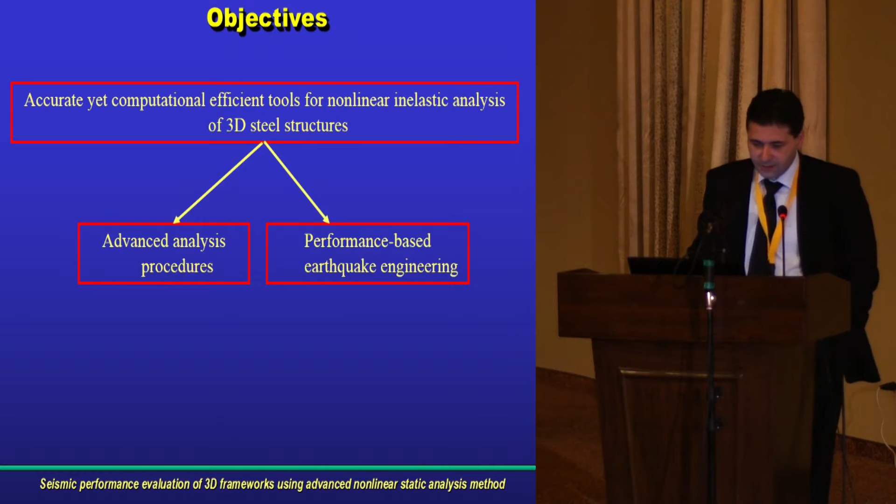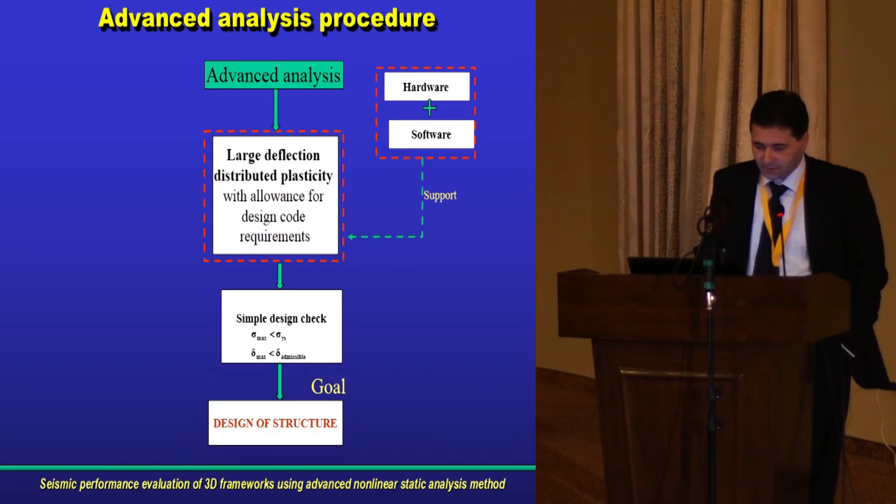In the advanced analysis procedure, accurate predictions of the nonlinear inelastic analysis of frameworks represent the key element, and such analysis can directly assess the strength and stability of the overall structural system. Separate member capacity checks are not required. A large deflection distributed plasticity analysis that includes spread of plasticity, residual stresses, initial geometric imperfections, and other second-order effects would certainly be classified as advanced inelastic analysis, in which checking of beam-column interactions is not required.

Reliable nonlinear analysis tools are also essential in performance-based earthquake engineering. Accurate predictions of the ultimate limit states are essential to perform pushover analysis, for instance, to compute the capacity curve for seismic performance evaluations of frameworks.

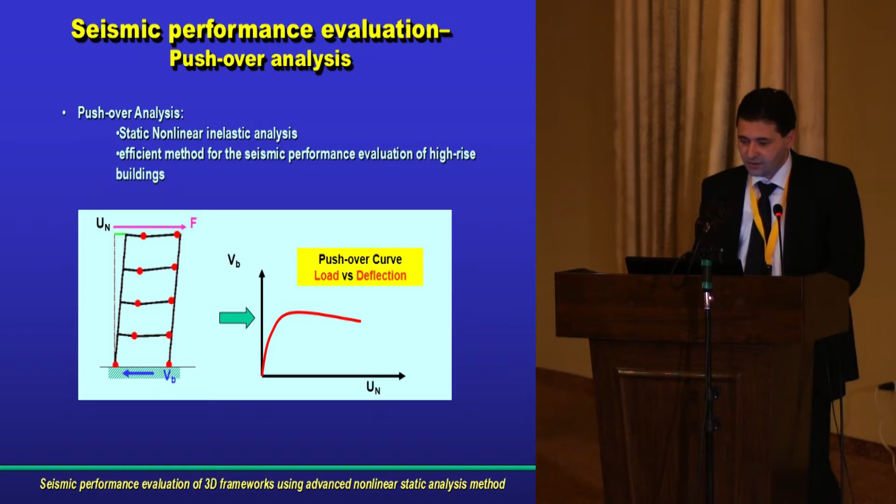The nonlinear inelastic static analysis procedures developed here use the accuracy of the fiber finite element approach for inelastic frame analysis, and address its efficiency and modeling shortcomings through the use of only one element to model each physical member of the frame. This is essential to approach real large spatial frame structures, combining modeling benefits, computational efficiency, and reasonable accuracy. The following assumptions are adopted in the formulation of the analytical model.

Plane sections remain plane but not necessarily normal to the deformed axis. Torsional buckling does not occur. Small strain but arbitrarily large displacements and rotations are considered. The connections could be semi-rigid, and this node is of zero length. The joints can also be considered with finite dimensions.

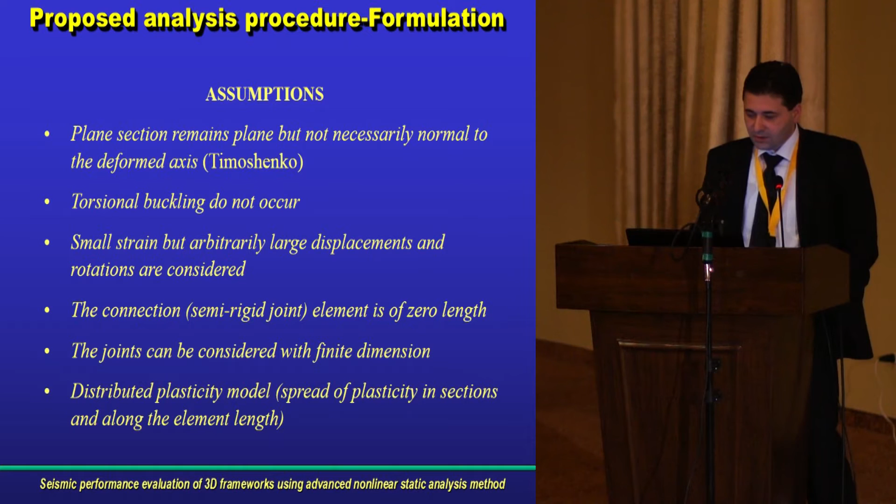The proposed approach is based on the most refined type of second-order inelastic analysis. A distributed plasticity model is involved, where elastoplastic behavior is modeled, accounting for spread of plasticity effects in sections and along the element length.

Currently several methods are available. One of the most used is based on the finite element method, which requires dividing the member into several small elements, and for this reason is not user-friendly for practical applications. These methods ignore many important characteristics and requirements for practical design, such as consistency between the linear and nonlinear models, due to the need to use several elements per member to model the nonlinear effects, which increases the computational effort.

The proposed element is developed in the framework of the flexibility-based approach. This element is more accurate than displacement-based elements because internal work is derived from an assumed force distribution function that relates the internal forces along the member length to the member end forces, allowing the use of only one element per member to model the inelastic behavior.

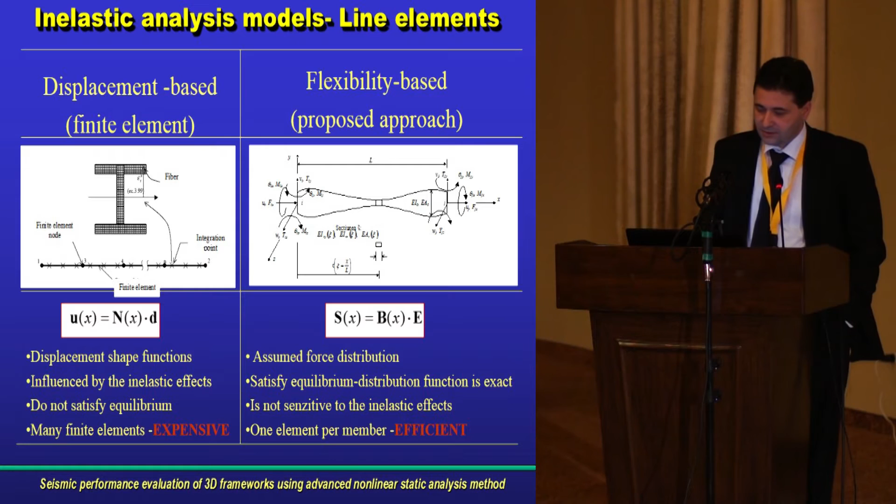A sketch of the three-dimensional beam column element with 12 degrees of freedom is presented on this slide on the right side. The already mentioned assumptions allow the formulation details to be considered on two distinct levels: the cross-sectional level and the member longitudinal axis level.

Thus, the nonlinear response of a beam column element can be computed as a weighted sum of the response of a discrete number of cross-sections located at the numerical integration scheme points. The cross-section stiffness may be modeled by explicit integration of stresses and strains over the cross-section area - in this case, we call the procedure micromodel - or by calibrated parametric equations that represent force-generalized strain curvature response, which we call the macro model.

Gradual plastification through the cross-section subjected to combined action of axial force and biaxial bending moments is described through basic equilibrium, compatibility, and material nonlinear constitutive equations. In this way, the states of strain, stresses, and yield stress are monitored explicitly during each step of the analysis. The arbitrary cross-sectional shape and the effect of material imperfections such as residual stresses, various cross-sectional shapes, and other factors are accurately included in the analysis.

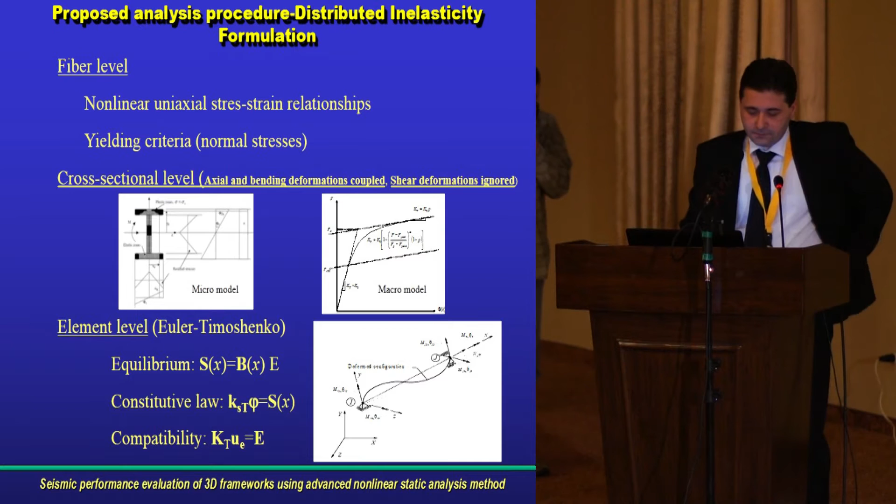One of the key issues in developing such a procedure is the high accuracy and computational efficiency in evaluating the elastoplastic behavior of cross-sections subjected to axial force and biaxial bending moments. Therefore, our research program has paid very careful attention to inelastic modeling of cross-sections, developing advanced procedures for moment curvature analysis, ultimate strength analysis to draw interaction diagrams, and automatic design procedures.

Considering the cross-section subjected to the action of external bending moments about each global axis and axial force, as shown in this figure, and under the above assumptions, the resultant strain distribution corresponding to the curvatures about global axis and the axial strain can be expressed in a linear form throughout the cross-section. This implies a perfect bond between the steel and concrete components of composite concrete-steel cross-sections.

The basic equilibrium equations for the axial load and the biaxial bending moments are given in terms of the stress resultants, and the deformations field is assumed linear. We can consider the equilibrium expressed using three equations for axial force and bending moments, and we can consider complex stress-strain relationships for concrete and steel, with arbitrary shapes of cross-sections accounted for.

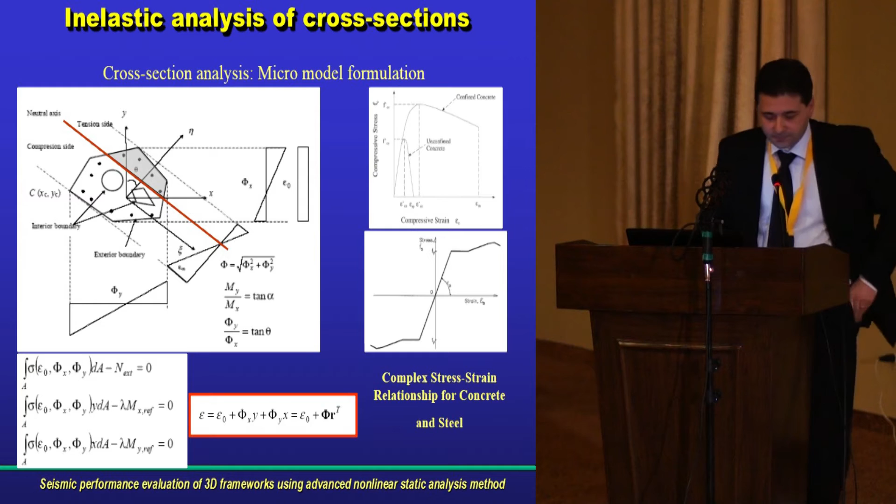We have developed three numerical procedures in order to highlight the inelastic behavior of cross-sections. One of the most comprehensive procedures is called here moment curvature analysis.

We consider the cross-section subjected to biaxial bending moments and axial forces. The equilibrium between internal forces and external forces is resolved by applying a numerical method, for instance Newton-Raphson. Solving this system of equations, we obtain parameters that define the deformations of the cross-sections: axial deformations and curvatures.

In this way, we can determine, for given external forces, the deformations at any point of the cross-sections. If the moment curvature diagram represents the concern, a more sophisticated numerical algorithm such as the arc length method is applied, and in this way we have a clear picture of the inelastic behavior of the cross-section.

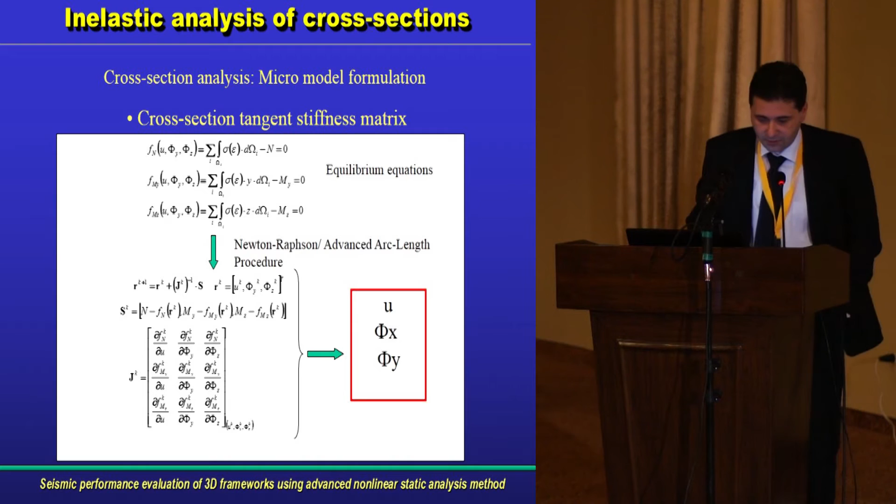The tangent stiffness matrix for the cross-sections relates small changes in the deformations to small changes in the action sustained. The incremental relationship between incremental efforts and incremental deformations can be expressed as in the equations, the matrix equations.

The tangent rigidity for major and minor axis bending are defined by solving the incremental constitutive equations and imposing the condition of constant axial load and bending moment about each principal axis of the cross-section. In this way, we can define the tangent flexural rigidities about each principal axis of the cross-sections.

These tangent flexural rigidities are used in the nonlinear analysis of frameworks. We can determine the stiffness matrix of the beam column element, considering the element with variable rigidities along the element length as a function of the distribution of the efforts.

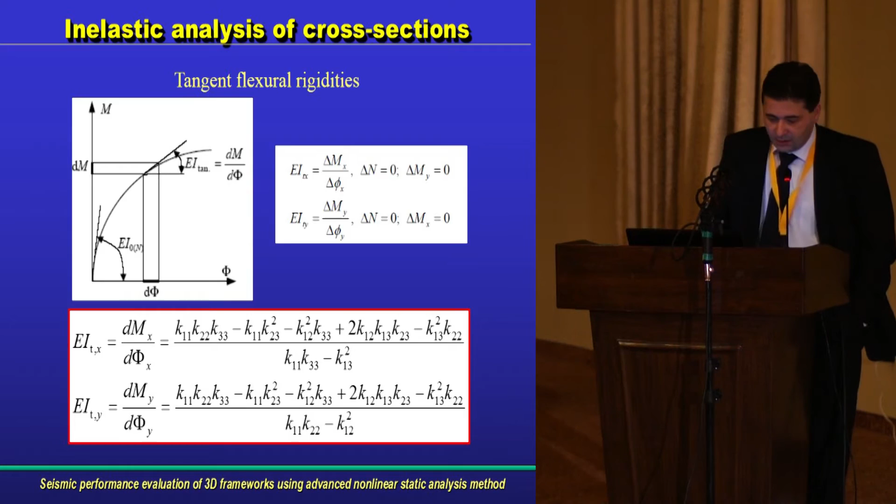Another numerical procedure has been developed to determine directly the plastic interaction diagrams. We can determine the plastic surfaces by drawing the vertical interaction diagrams or horizontal interaction diagrams. In this respect, an incremental iterative procedure based on the arc length approach has been developed.

At ultimate strain capacity, the equilibrium is satisfied when the external forces are equal to the internal ones, and at the most compressed or tension point the ultimate strain is attained. Under the above assumptions, the problem of ultimate strength analysis of composite concrete-steel cross-sections can be formulated as: given a strain distribution corresponding to a failure condition, find the ultimate resistances, axial force and bending moments about each principal axis, so as to fulfill the basic equations of equilibrium.

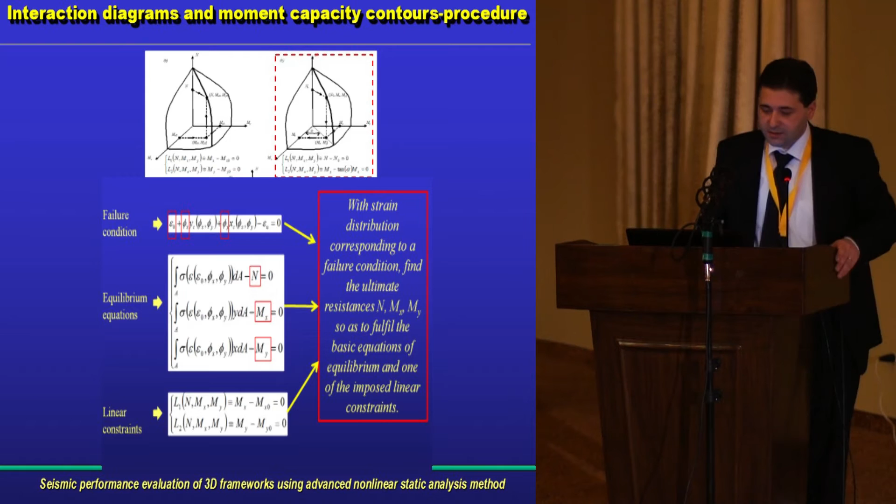And one of the following linear constraints you can see in this picture is accomplished. In this picture, I have detailed the procedure to determine the vertical interaction diagrams. For instance, for a given axial force and for a ratio between bending moments, we can draw automatically and directly the interaction diagram.

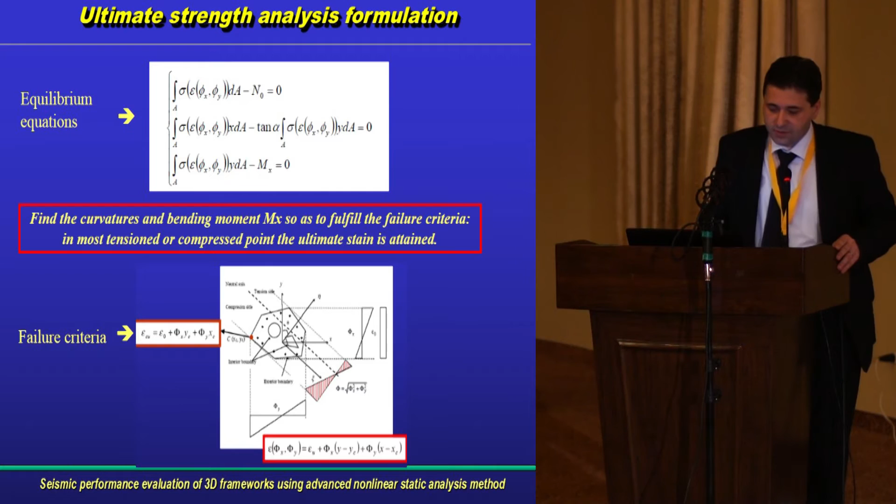Here are presented some key elements of the procedure. Basically, we have to resolve a system of equations with three coupled equations, imposing the constraint given by the failure of the cross-section at a point, at the most compressed or most tensioned point, where the ultimate strain is attained.

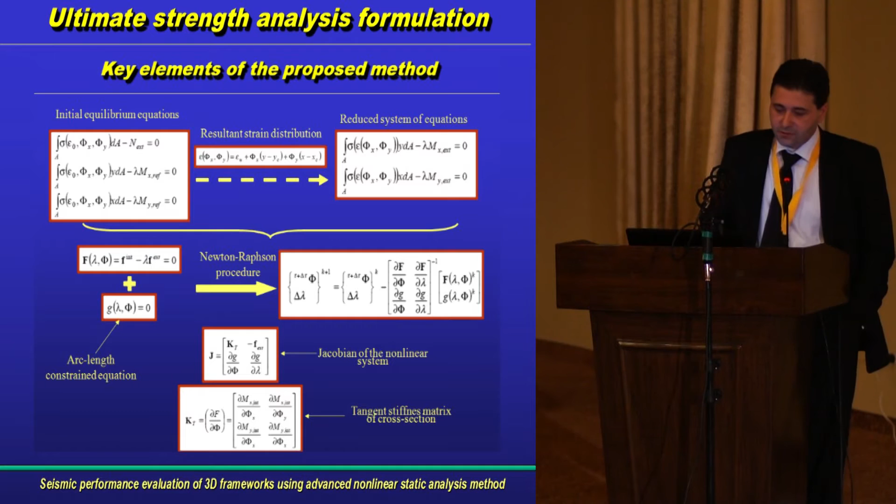The system of three coupled equations becomes two coupled equations, and these equations are solved by applying an arc length procedure, and in this way we can draw the complete diagram, varying the axial force as a parameter. Here it's presented the graphical representation.

Here we have the graphical representation of the procedure, and on the left side we have the representation in the moment ultimate curvature space, and on the right side we have the interaction diagram.

We can observe clearly in these representations that at the peak moment, the tangent stiffness matrix of the cross-sections becomes singular. This point corresponds to a balance point in the axial force-bending moment space.

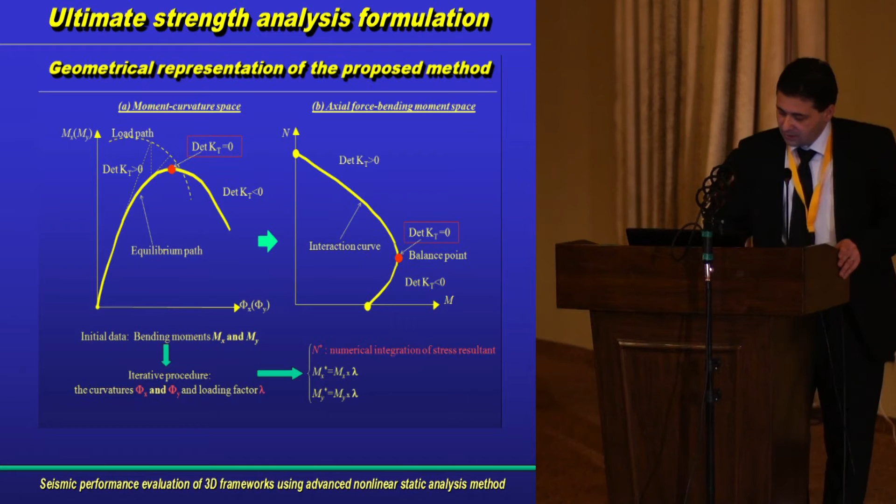Consideration of the arc length procedures, which can traverse the points beyond the peak points where the stiffness matrix becomes negative definite, is essential. So the arc length procedure is essential and is a key element of this procedure.

Another numerical procedure has been developed to automatically design arbitrary cross-sections, reinforced concrete or composite steel-concrete. The aim of this procedure is to determine directly the total reinforcement area, considering known external efforts for a given axial force and given bending moments. Automatically, the total reinforcement area is determined.

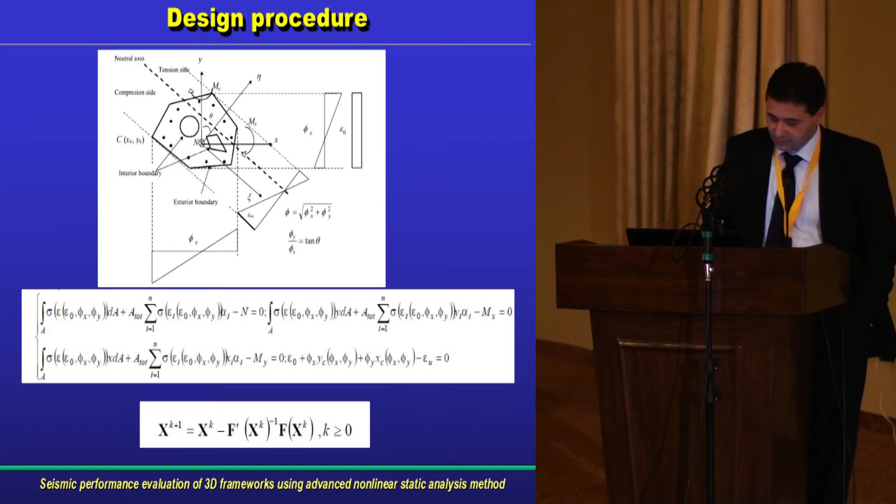One of the most important aspects of inelastic evaluation of cross-sections represents the procedure for integration over the cross-section, the tensions, deformations, and so on. Most existing methods for the analysis of cross-sections under axial load and biaxial bending rely on the numerical integration of stress resultants using the fiber decomposition method in the first row, Gauss quadrature, or computer graphics. All three mentioned methods are not numerically efficient due to the large amount of information needed to characterize the section and the high number of operations required.

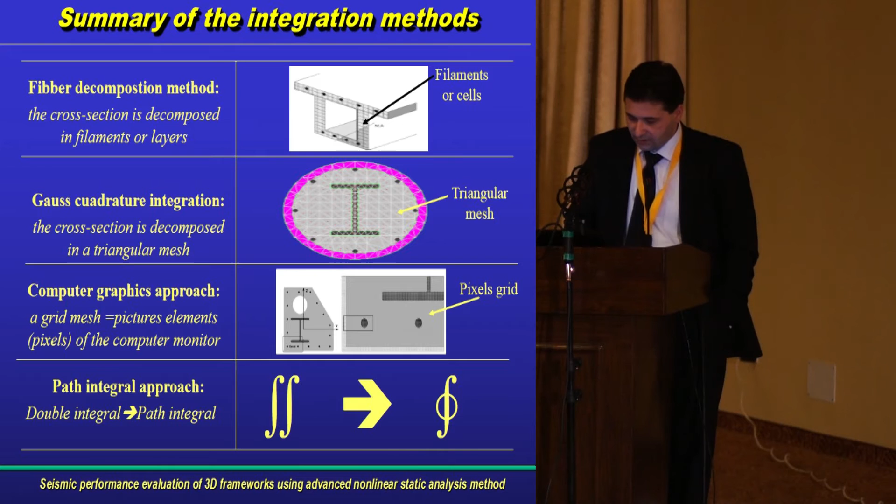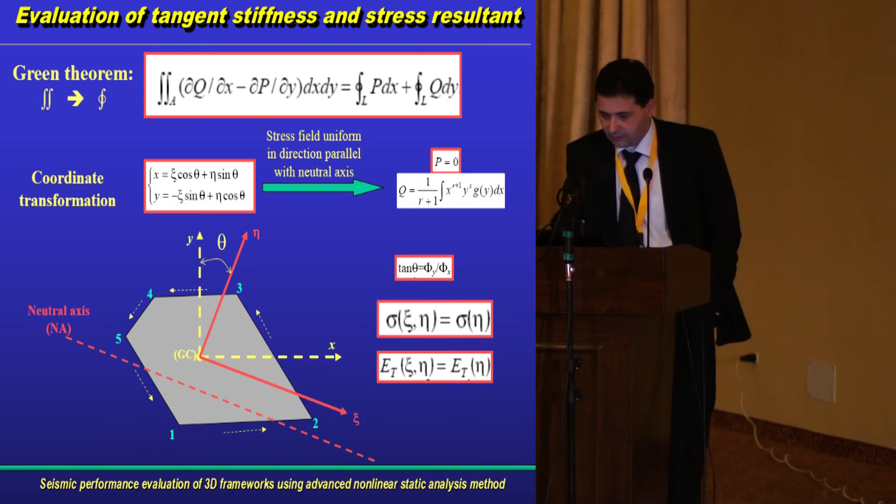to implement the stress integration with a lower error level. So we choose a more efficient approach, the path integral, and in this approach the double integrals are transformed into a path integral. We have in this way only to monitor several points on the contour of the cross sections, and this method is more rapid than current methods, and also gives more accurate results. We can take into account also the residual stresses.

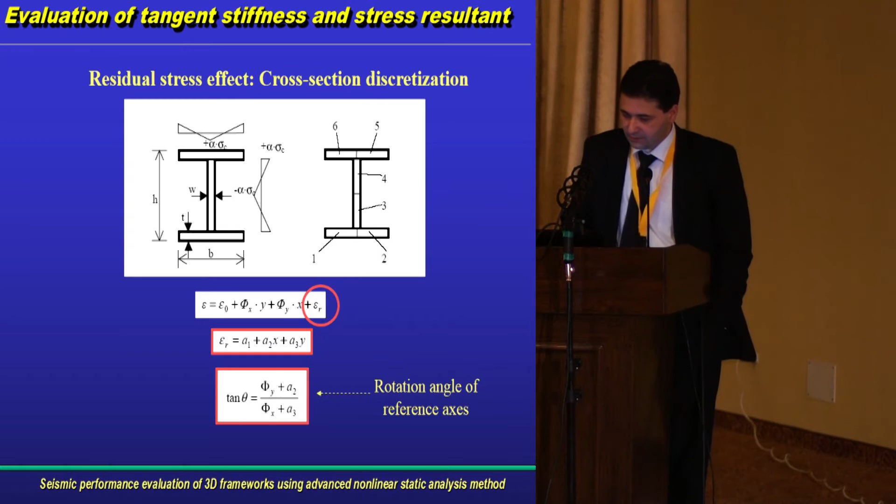Residual stresses are explicitly taken into account, considering several distributions given in norms, European or American. Also, various cross-sectional shapes we can take into account. Usually in the fiber-based finite element analysis, fillet regions of steel cross-sections are ignored. These simplifications could lead to underestimations of the rigidity and flexural strength of the whole element and structure as well.

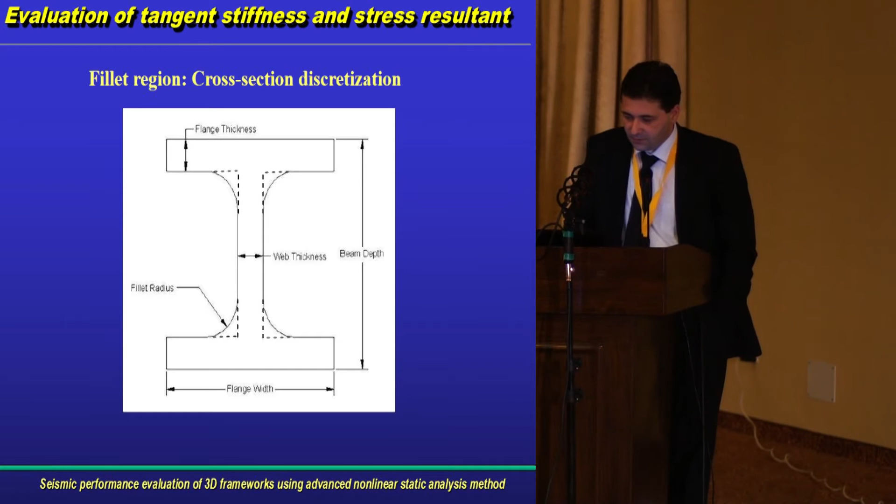And this aspect will be underlined here in several computational examples. It is important to mention that in the literature, this aspect is usually overlooked. Consequently, the results are not always consistent with the powerful computational models developed.

Another way to consider elastoplastic response is based on force-strain relationships. We developed only for steel cross-sections such an analytical relationship in order to represent adequately the partial plastification effects associated with bending and axial forces. In this approach, the effect of axial forces on the plastic moment capacity of sections is considered by standard strength interaction curves.

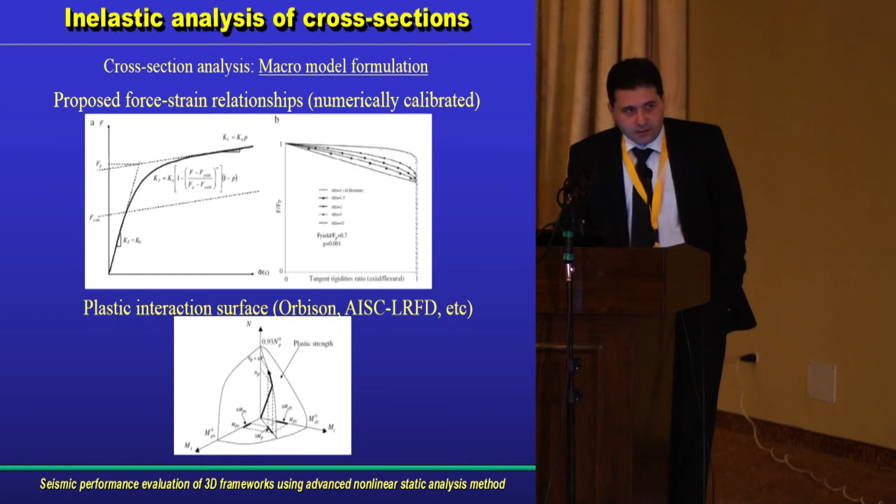Flexibility-based method is used to formulate the distributed plasticity model of a 3D frame element with 12 degrees of freedom under already mentioned assumptions. In this approach, an element is represented by several cross-sections located at the numerical integration scheme points. The spread of inelastic zones within an element is captured considering the variable section flexural rigidities along the member length, depending on the bending moments and axial force level, cross-sectional shape, and nonlinear constitutive relationships.

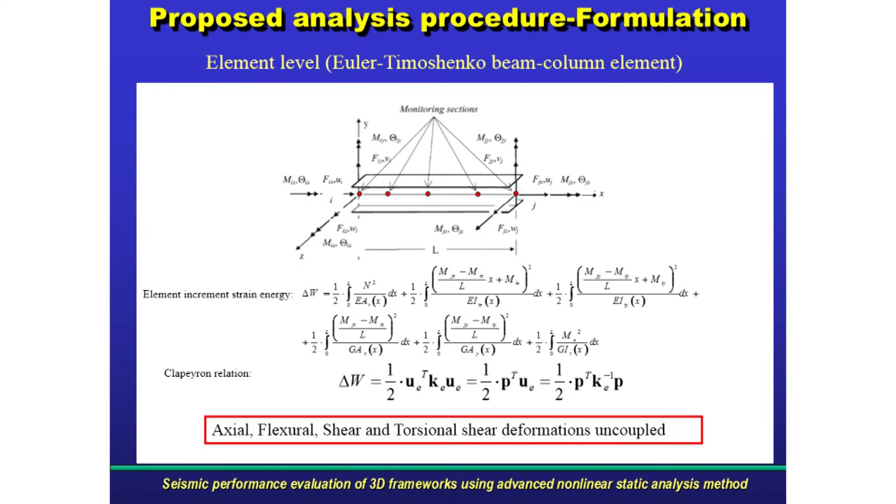The element stiffness matrix, implicitly defined by the Clapeyron relation, will be obtained by recovering the explicit expression for the element increment strain energy. Here are presented the basic relations, and here are presented some of the submatrices, the flexibility submatrix. The stiffness matrix will be determined by inverting the flexibility matrix.

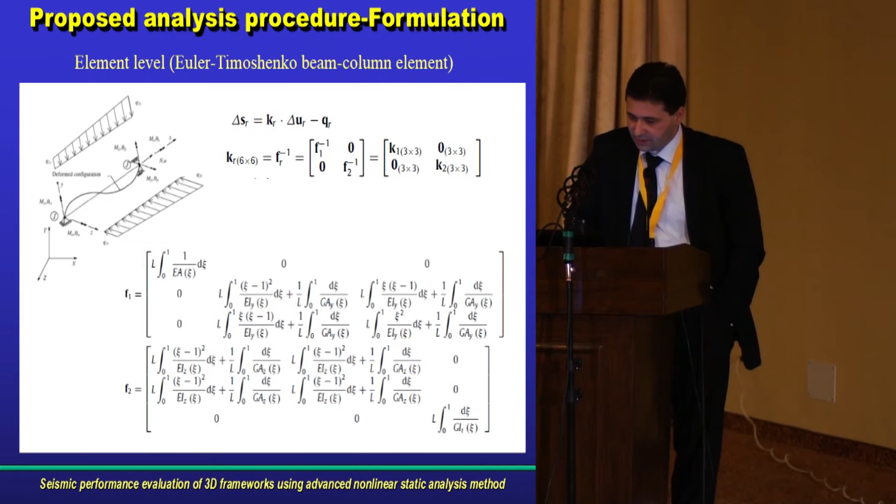It's important to note that in the proposed procedure, the loading that the member lateral loads transfer to the nodes, taking into account the element nonlinear behavior, are allowed and included automatically in the analysis. This leads to a significant saving in inputting the member loads without the need to divide the member into several elements for simulation of these loads.

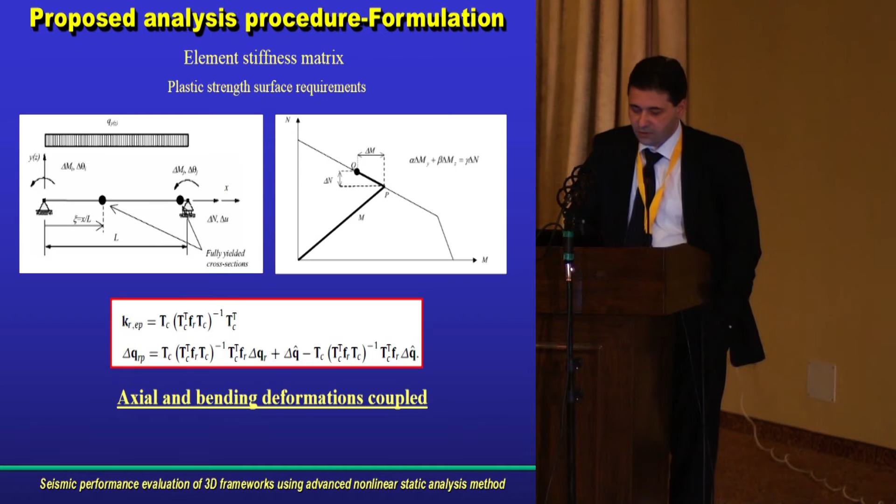The equivalent nodal forces will be computed in order to accommodate member lateral loads, local geometrical imperfections, and the plastic strength surface requirements. The method ensures also that the plastic bending moment is nowhere exceeded once the full plastic section develops.

Our procedure can be applied even when a plastic hinge, a fully plastified cross section, forms along the element length without the need to divide the member length into 2 or more segments as in the common procedures.

The geometrical nonlinear effects for each element are taken into account in the present analysis in a beam-column approach by the use of inelastic stability stiffness functions and updating at each load increment the length, axial force, and the flexural rigidity about each principal axis of the element. In this way, we minimize modeling and solution time. Generally, only 1 or 2 elements are needed per member.

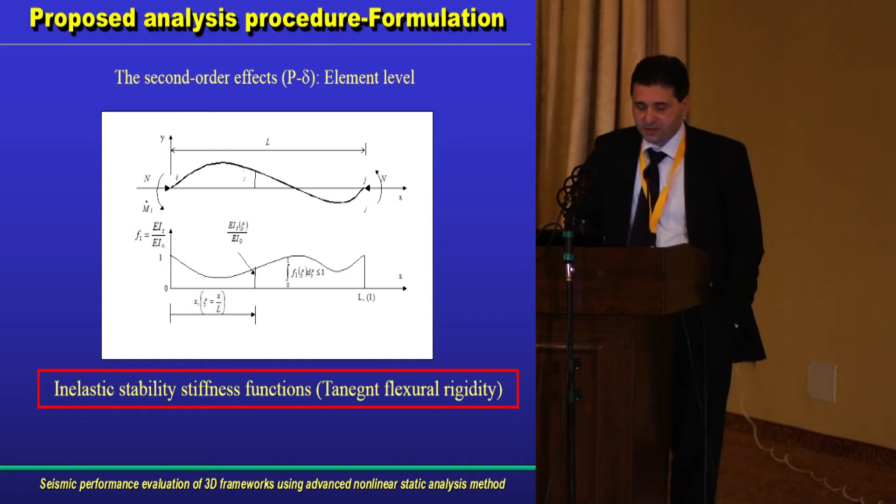The behavior of connection elements in each principal bending direction, major or minor axis flexibility, is represented by a rotational dimensionless spring attached to the member ends. We assume no coupling between different rotational degrees of freedom at the connection, and the present formulation can model both major and minor axis flexibility.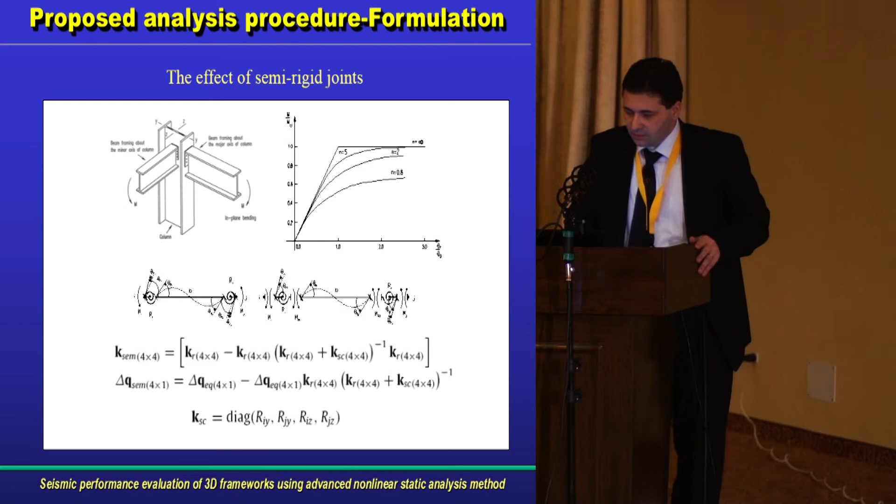Using an updated Lagrangian formulation, the global nonlinear geometrical effects are considered, updating the element forces and geometry configuration at each load increment. The natural deformation approach in conjunction with the geometrical rigid body qualified stiffness matrix is adopted for the element force recovery, and the web plane vector approach is effectively used to update the frame element coordinates.

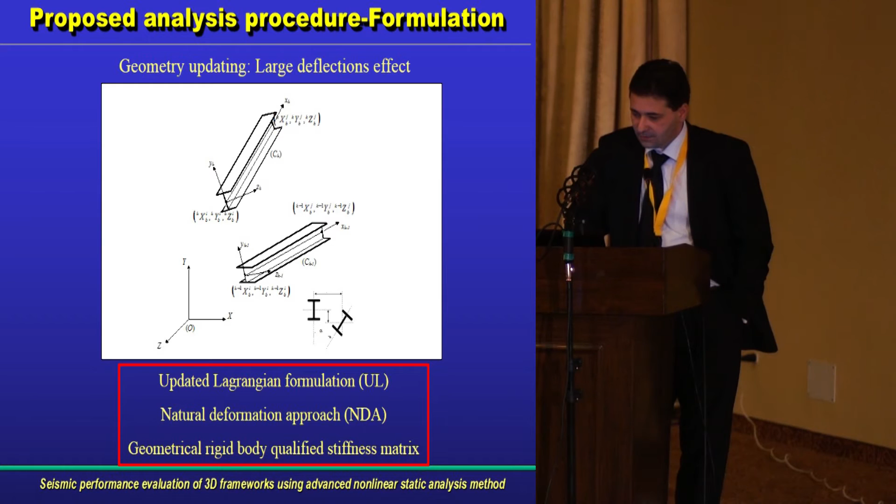In order to trace the equilibrium path for proportional and non-proportional plane loads, the proposed method has been implemented in a simple incremental and incrementally iterative matrix structure analysis program. The nonlinear analysis is based on an advanced procedure, the arc length method. Using this method, we can determine the response of the structure even in the negative domain, post-critical, highlighting the snapback and snap-through behavior.

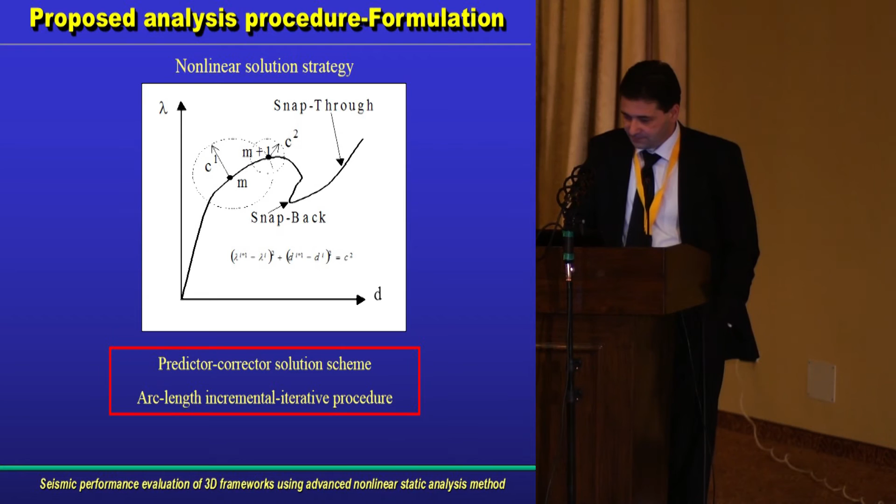Based on the numerical analytical procedures, some of the elements presented here have been developed into a computer program. This computer program can be used to analyze three-dimensional frames made of steel, reinforced concrete, or composite steel-concrete elements.

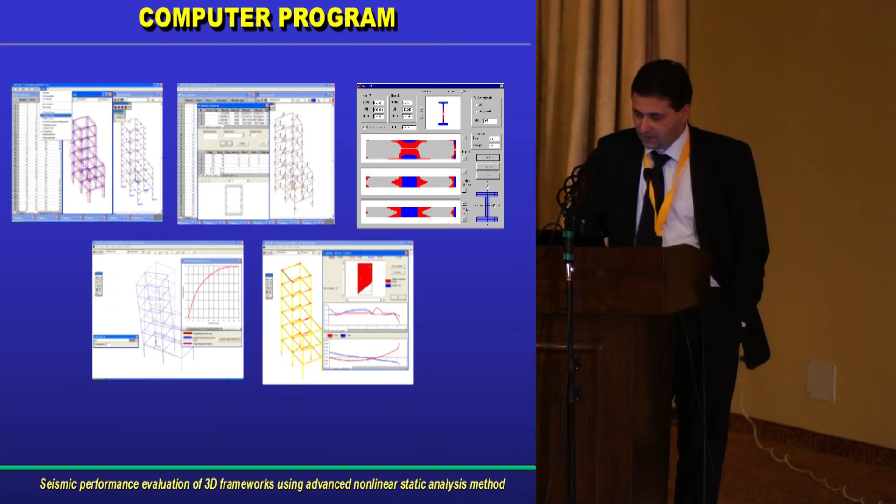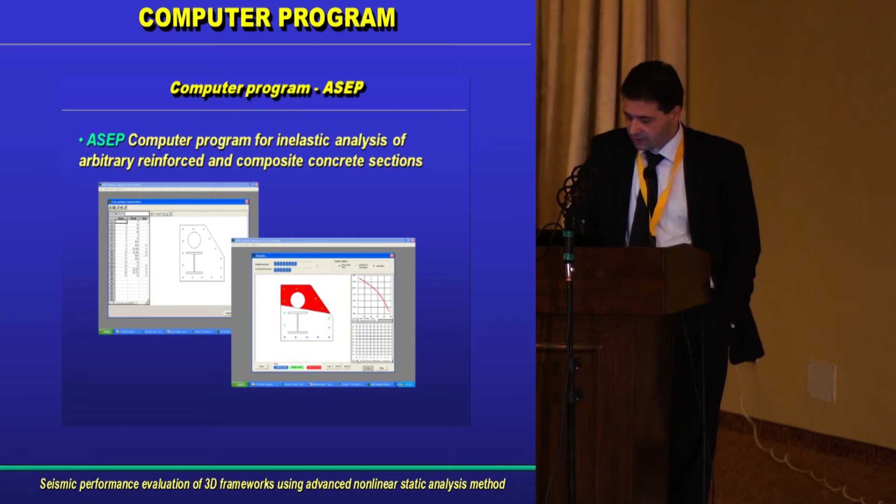Also, another computer program has been developed for inelastic analysis of cross sections. Using this program, we can perform an M-N analysis. We can draw the moment-curvature diagram. We can determine automatically and directly plastic interaction diagrams, and also we can design the cross sections.

Now, several computational examples are given here in order to validate the numerical procedures already presented. We'll start the presentation with cross-section analysis procedures. We have here a composite cross-section with an asymmetrically placed steel profile.

Inelastic, the model considers inelasticity for the concrete and steel. The compressed concrete is modeled

using these analytical relationships, in which is evidenced the strain softening effect. The strain softening effect has a very important role in the determination of the ultimate strain capacity.

In this figure are represented the moment capacity diagrams for axial force. In this example, the axial force is 3,000 kilonewtons. We can see that if we consider the strain softening effect, the descending branch of this curve, the ultimate strain capacity is reduced, and also

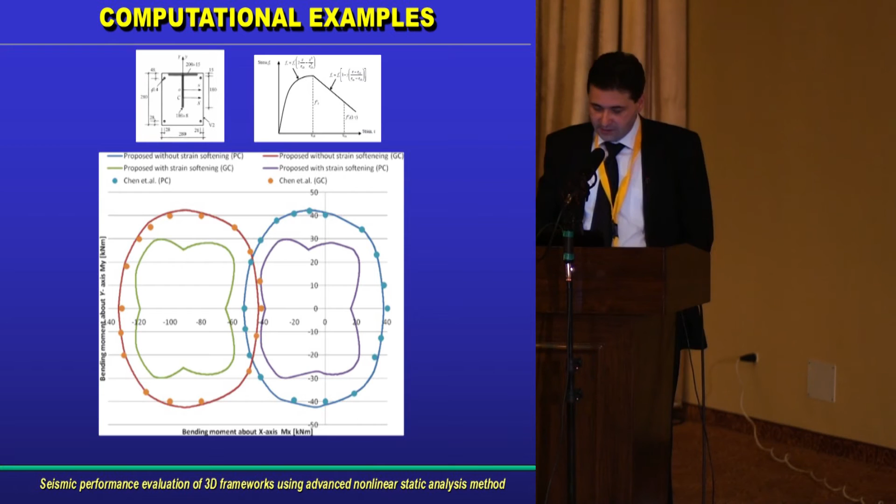And also, many of the numerical procedures developed, found in the literature, have great difficulty considering this effect. So the main conclusions of these computer examples is that if we consider the strain softening effect, the capacity curves are non-convex, and also the ultimate strain capacity is reduced.

Here, the same issue is highlighted: if we increase the compression axial loads, the ultimate strain capacity is reduced, and also the non-convexity is more aggressive.

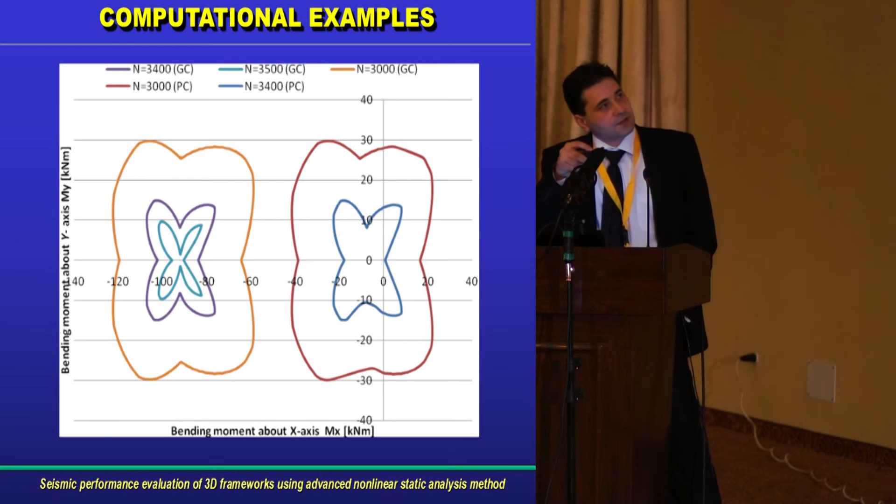Such as in these diagrams, here we can see such crazy curves. Here in the vicinity of pure compression, the solutions are not unique, and also near this region, the capacity curves are very strange.

The response is very hard to determine using traditional methods that control analysis only in deformations. Our procedures use the arc length method. The results are controlled in deformations and loads simultaneously.

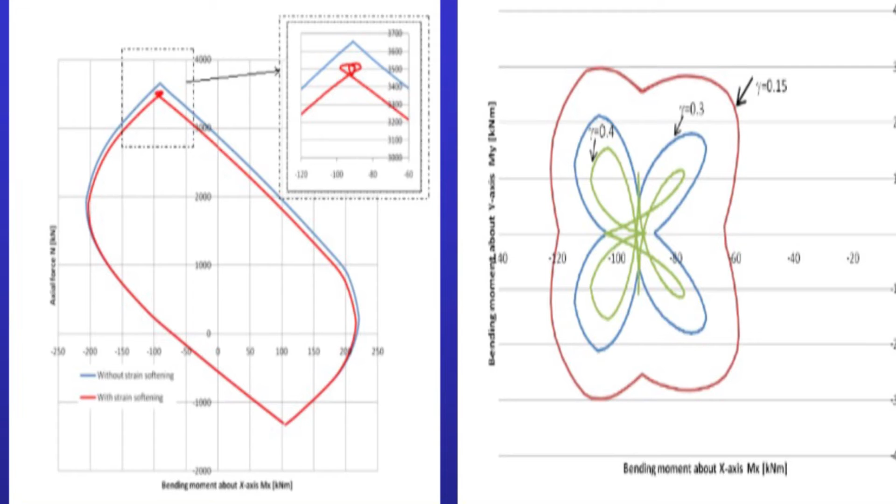Another interesting result: when we considered the residual stresses throughout the encased steel profile in composite steel cross sections, the residual stresses reduce the ultimate strain capacity, and

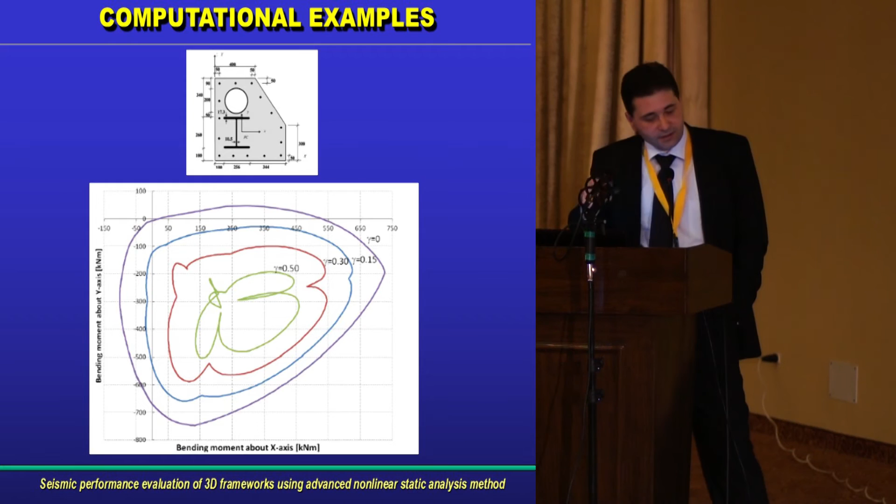for instance, these cross-sections are analyzed considering different levels of compressive axial force and different distributions for the residual stresses, using European distribution and American distribution.

And we can see that the ultimate strain capacity is reduced with increasing axial force, and this reduction reaches even 40%. So the consideration of the residual stresses for encased steel cross-sections is important to take into account.

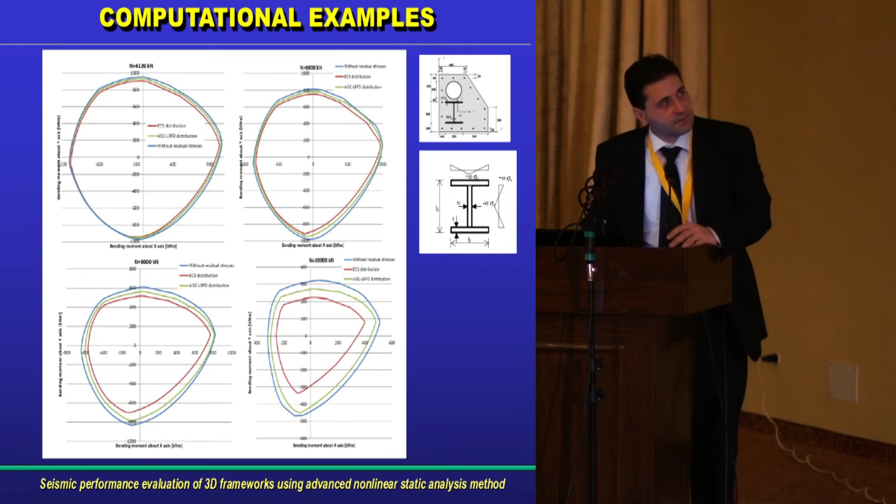The same results represented in the bending moment space, and this picture represents the variation of the flexural rigidity with the intensity of the bending moments, and the same conclusions can be underlined.

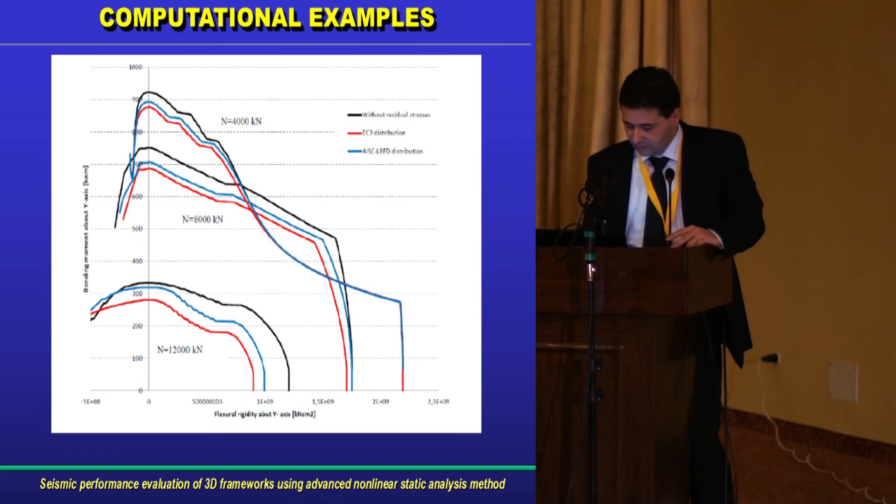Another computational example: this cross-section has been analyzed in order to determine the total reinforcement area, considering the cross-section subjected to axial force and biaxial bending moments.

For these values, we obtain the total reinforcement area. We assume the distribution of the reinforcement bars to be known. The unknown is the diameter of the bars.

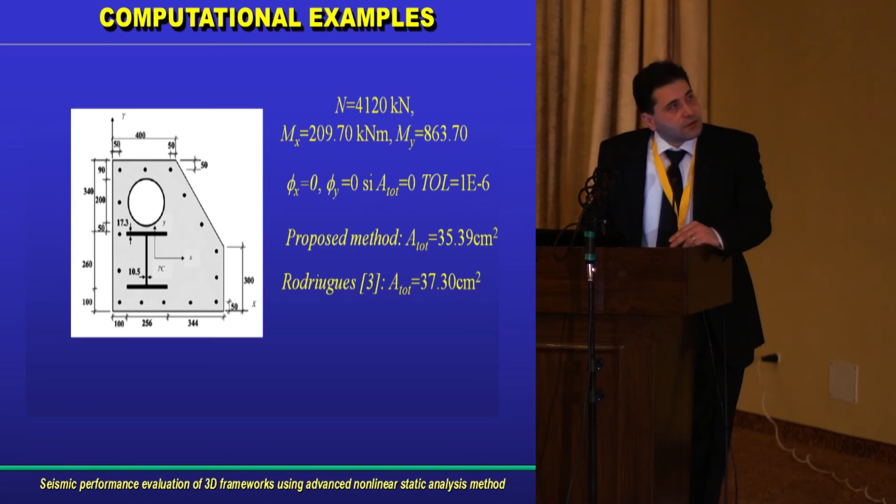Now, the following examples are given to validate the performance of the NEFCAD computer program. Here is a portal frame.

We have analyzed this frame in order to highlight the importance of the residual stresses. We can see that for pure steel, the residual stresses do not affect very much the ultimate load, the ultimate capacity, but the residual stresses have an

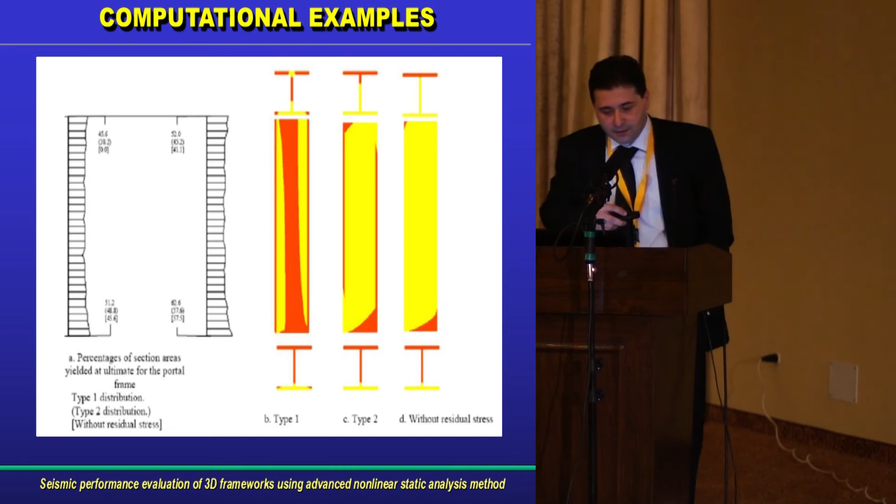important role on the flexibility of the frame. So the residual stresses have to be included in an advanced analysis. For instance, this frame has been analyzed considering three distributions of the residual stresses: European distribution, American distribution, and one

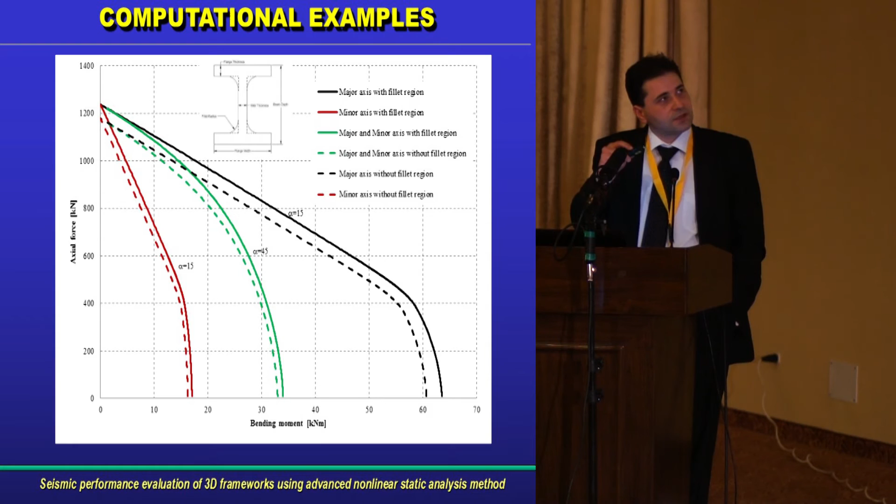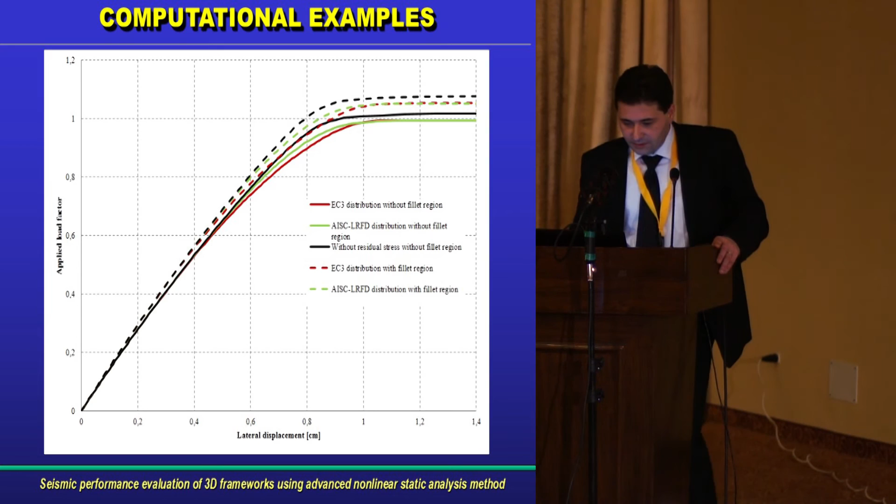Another computational example. We were very interested in considering the exact shape of the cross sections, and for instance, here we consider an HEB profile with and without considering the fillet regions.

As expected, the strength capacity of the cross section is reduced, and this reduction reaches 10%. And also, this effect can be evidenced

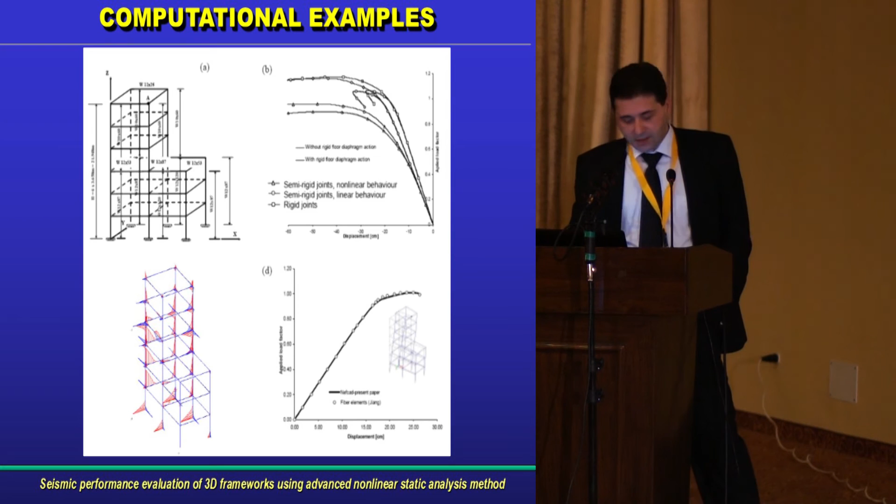at the global structural level. The ultimate load is also reduced if the fillet regions are not taken into account. Usually, in more sophisticated programs and in the literature, this aspect is overlooked. The cross sections are modeled in advanced models, in fiber element models, without taking into account the exact shape of the cross sections.

Here are several computational examples for three-dimensional frames with rigid or semi-rigid joints. We compare our results with results retrieved from the literature using more demanding methods that use very fine-grained finite elements, and our method is very compatible from the point of view of the results with these sophisticated methods, and also the computational time is more reduced.

For instance, this frame has been modeled with an advanced method that uses fiber finite elements. The total time to obtain the response using an advanced method based on fine fiber elements was 20 hours, and in our method we obtained similar results in only 6 minutes.

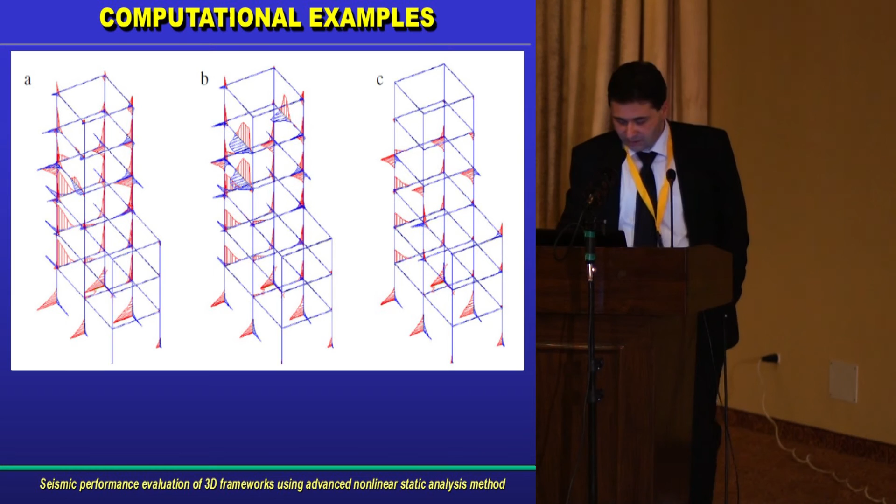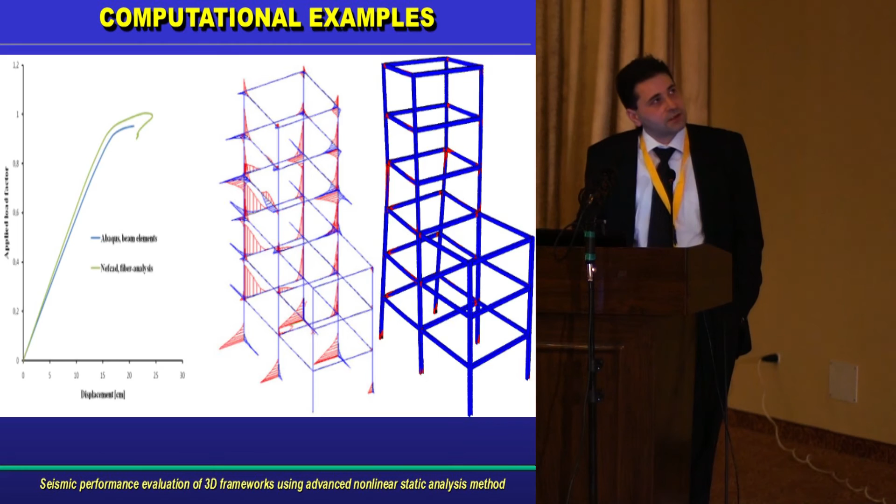So all these examples are given to validate our numerical procedure. Here are represented the plastic zone distributions in different situations: rigid nodes, flexible or semi-rigid joints with linear or nonlinear behavior. We compare the results with our model against results obtained in the most sophisticated computer program Abaqus. As can be seen on this graph, the results agree closely.

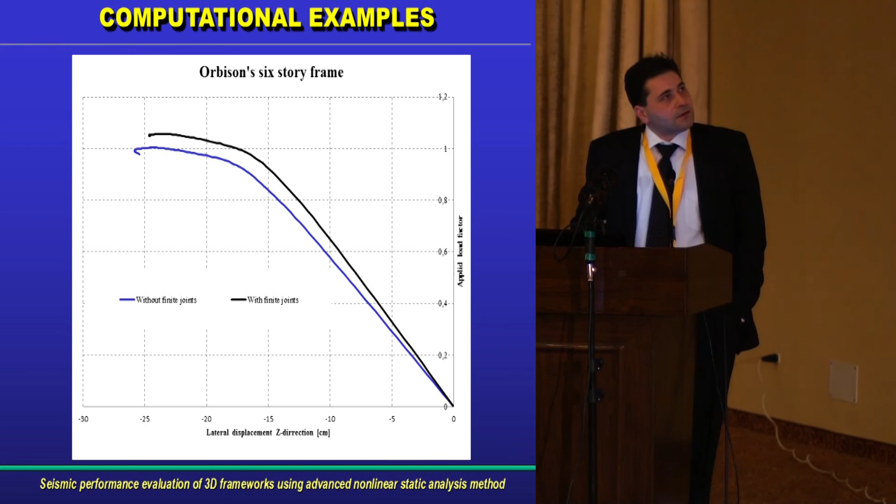So, the main conclusions of our research are the following. Considering the inelastic response of the cross-section, the proposed approach is general and can determine both moment capacity contour and interaction diagrams, the horizontal curves and vertical interaction curves. The proposed method is fast. The diagrams are directly calculated by solving just 2 coupled nonlinear equations at each step.

The proposed method is very stable. It is not sensitive to how the origin of the reference loading axis is chosen. It is not sensitive to the strain softening exhibited by concrete in compression or to nonlinear constitutive relationships. It is not sensitive to the initial or starting values. Very importantly, the proposed method reveals multiple solutions in the vicinity of pure compression, and the interaction diagrams are non-convex. We also highlighted that residual stresses play an important role when the compressive axial force is high.

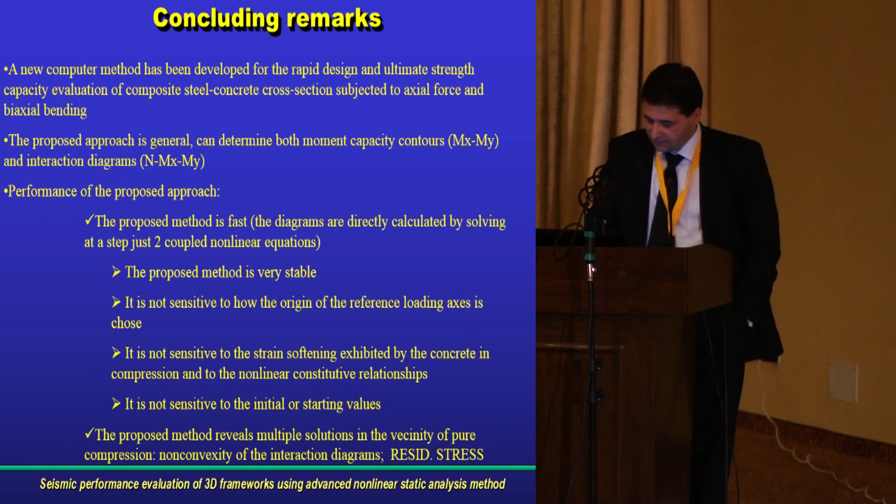Concerning the nonlinear analysis of frameworks, we can model the nonlinear response using only one fiber beam column element to take into account geometric and inelastic behavior. We use only one element per member, allowing us to consider gradual yielding associated with biaxial bending and axial force, and gradual spread of plasticity.

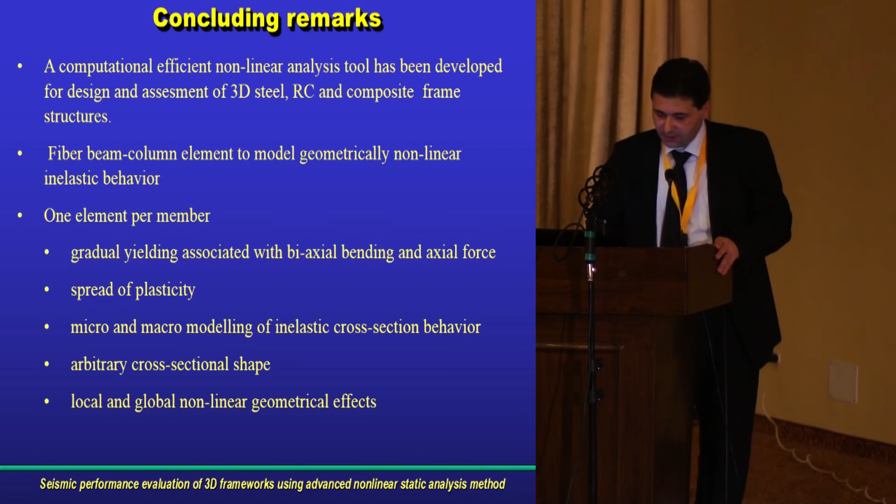We can model at the micro and macro level the inelastic behavior of cross sections, either using fiber discretization with explicit nonlinear constitutive equations, or by modeling the inelastic behavior through analytical force-strain relationships. Also, local and global nonlinear geometrical effects can be taken into account, along with nonlinear semi-rigid joints and distributed loads. We can determine the complete nonlinear behavior, pre- and post-critical response, including the snap-back and snap-through phenomena.

Future work is envisaged considering lateral torsional buckling. This effect is very important to consider in an advanced analysis. Also, for seismic performance evaluations, we implement advanced pushover methods considering adaptive force distribution and higher modes.

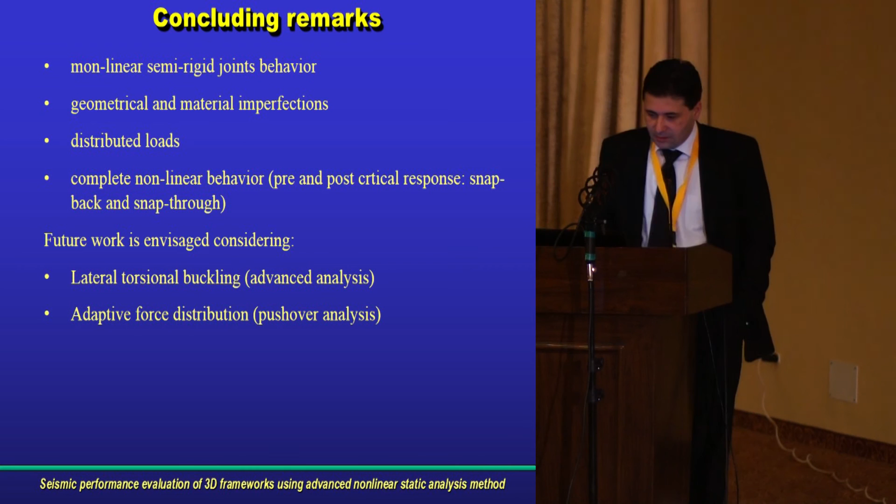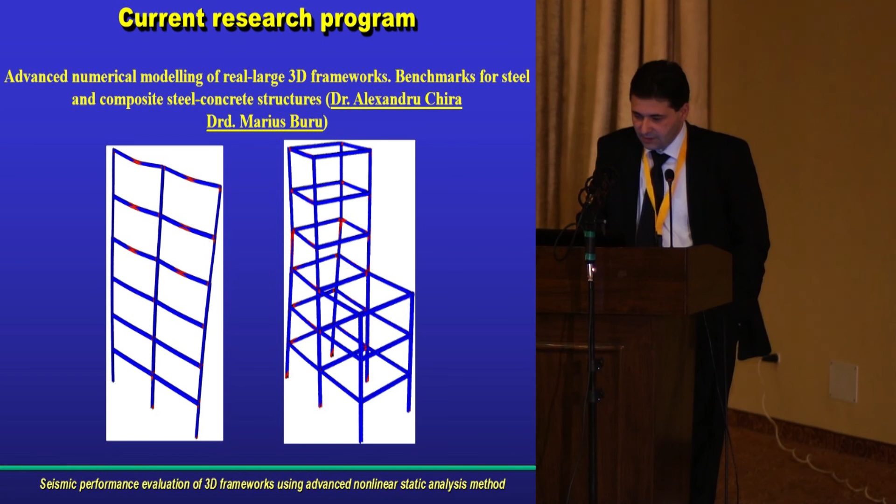With my young colleagues, Dr. Alexandru Chira and Drd. Marius Buru, we started a new program. The goal of this research is to develop guidelines that can aid nonlinear structural analysis software developers and structural engineers in understanding the requirements for capturing member and system strength limit states via advanced nonlinear analysis models developed in software requiring very fine-grained modeling using fiber, shell, or volumetric elements.

The Abaqus software package will be used in this research to validate the new computer methods and to determine their limitations. Several benchmark problems and solutions will be selected and used in the calibration process of the newly developed computational procedures. This represents a real need because in the open literature, only a few benchmark frameworks can be found, and they are not always well documented, with solutions given using FEM software that uses only line elements.

So if I have only 2 minutes, I will show some movies on the computer. Meanwhile, if you have any questions...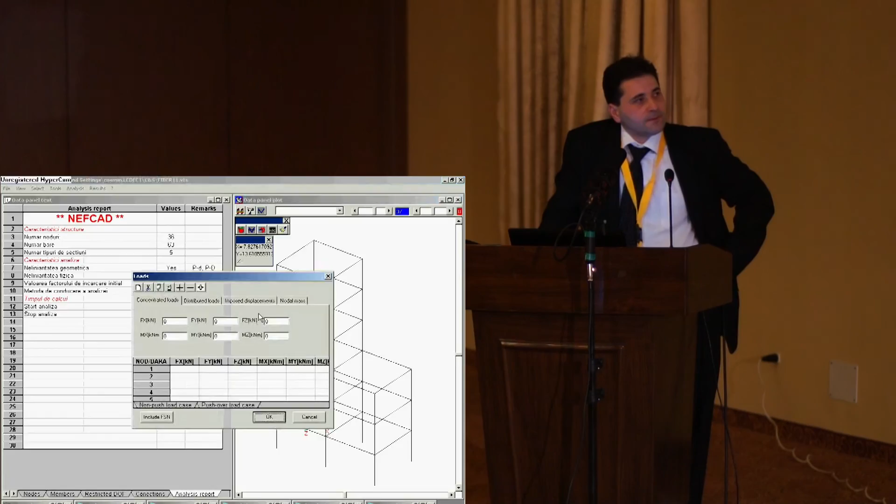Here is NEFCAD. You can see NEFCAD in action, showing the topology of the structure. As in linear models, the frameworks are modeled using only one element. Here we can see a reinforced concrete frame. Explicitly, inelasticity is taken into account using nonlinear stress-strain relationships for concrete in compression or tension. We can consider various arbitrary cross-sectional shapes, explicit distribution of the reinforcement bars, and different stress-strain relationships for concrete and steel.

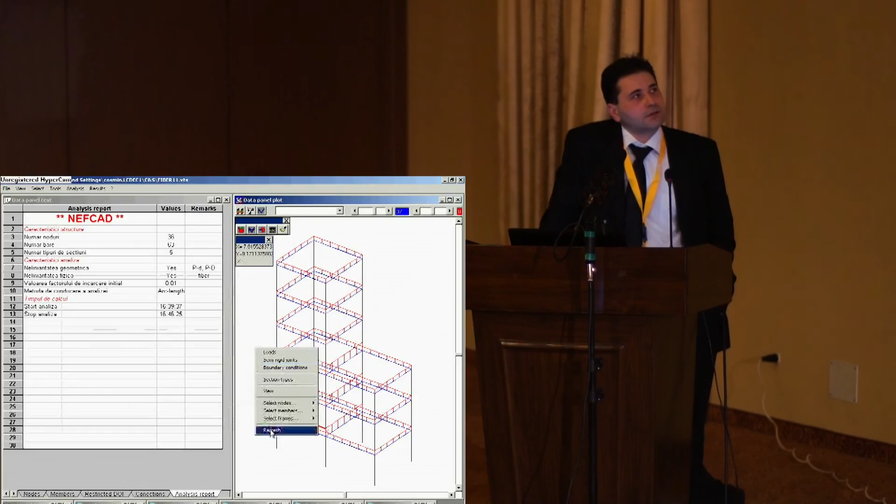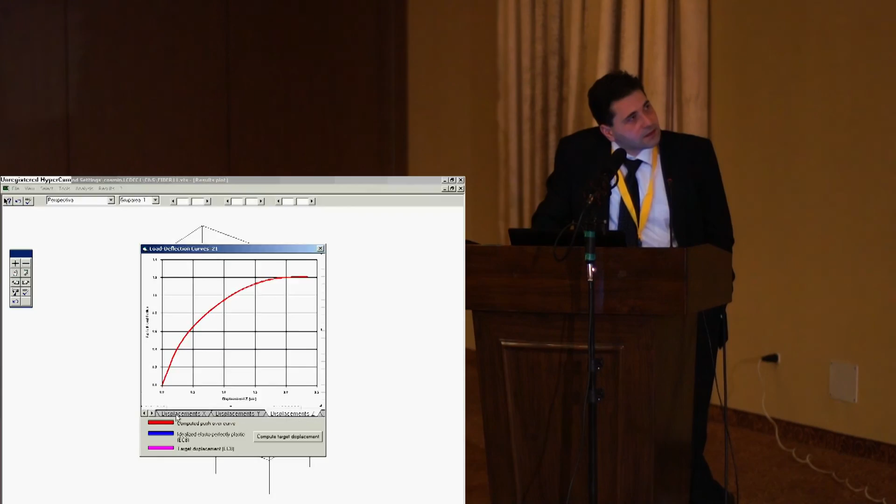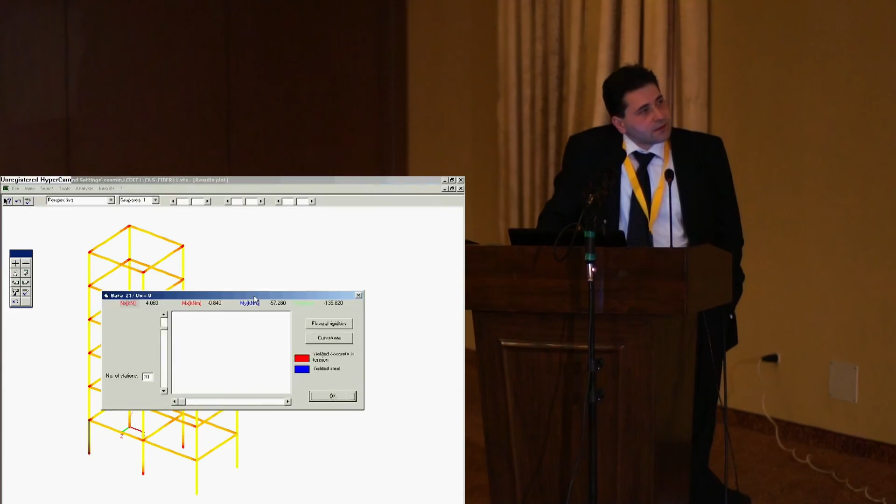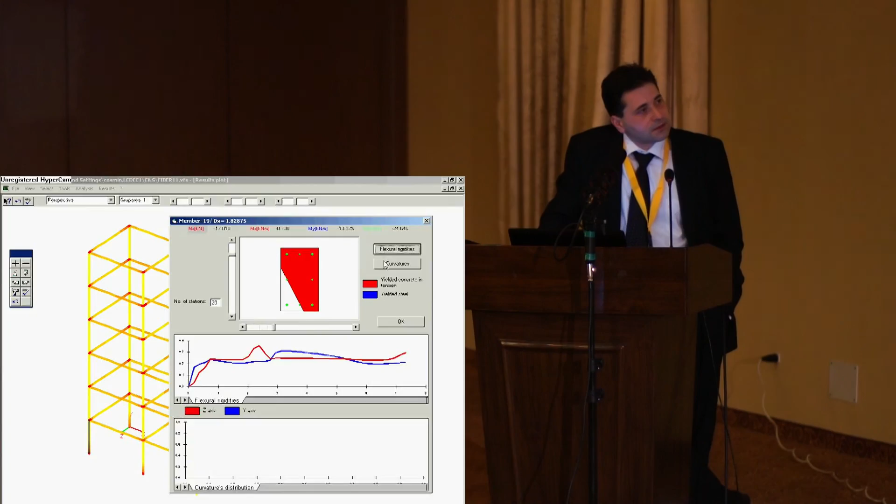I will accelerate a little bit since these steps are well known. Here a seismic analysis is simulated, with loads given by the loads associated to the first mode of vibration along with gravitational loads. The analysis is very quick; in only 2 minutes this structure has been analyzed.

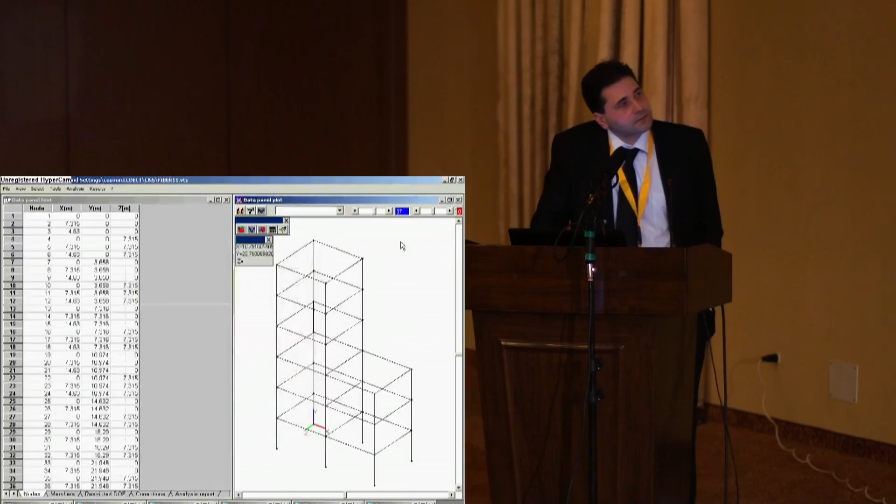We can see very clearly the load deflection response, the distribution of plastic zones for each member, and for each member we can see very clearly the distribution of plastic zones throughout the cross sections and along the entire element length. Flexural rigidities about each principal axis, and so on, and deflections until collapse.

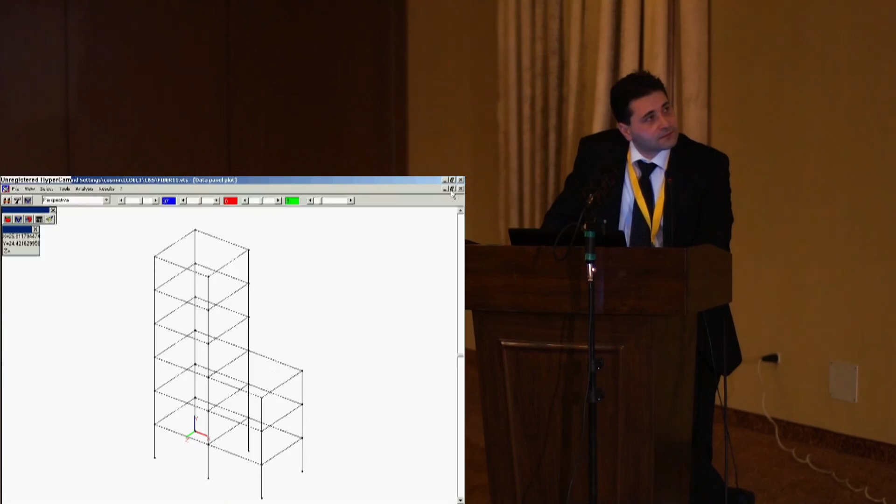This is the first program. Now the second one, please.

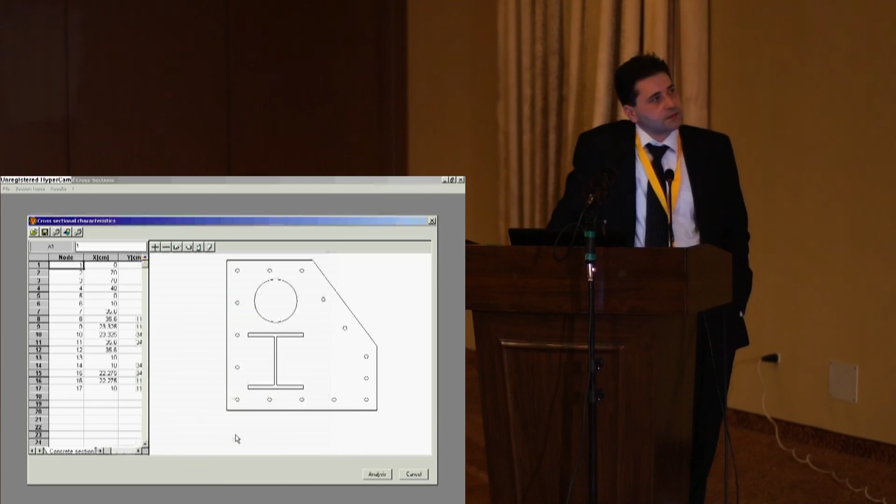Okay, this is a computer program called SEP. Using this computer program, we can determine the moment curvature response. We can determine the plastic interaction diagrams, and we can design any cross-section, including the reinforcement bars in the case of reinforced concrete or composite steel-concrete cross-sections.

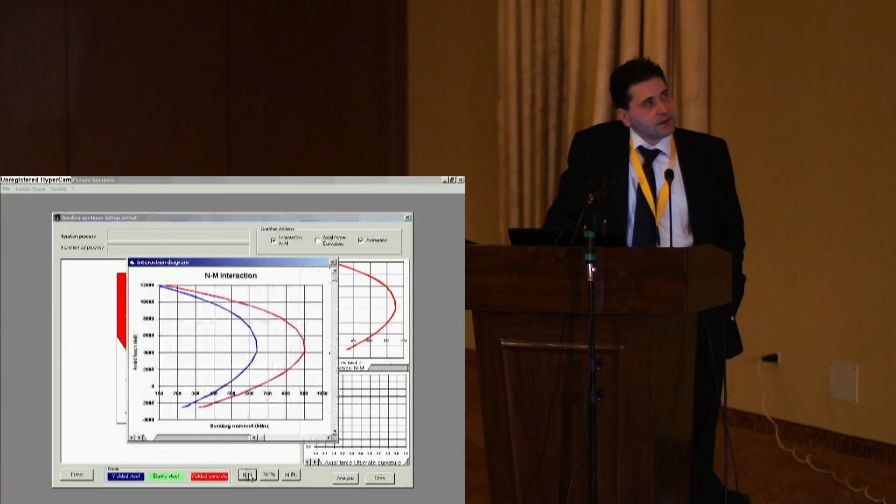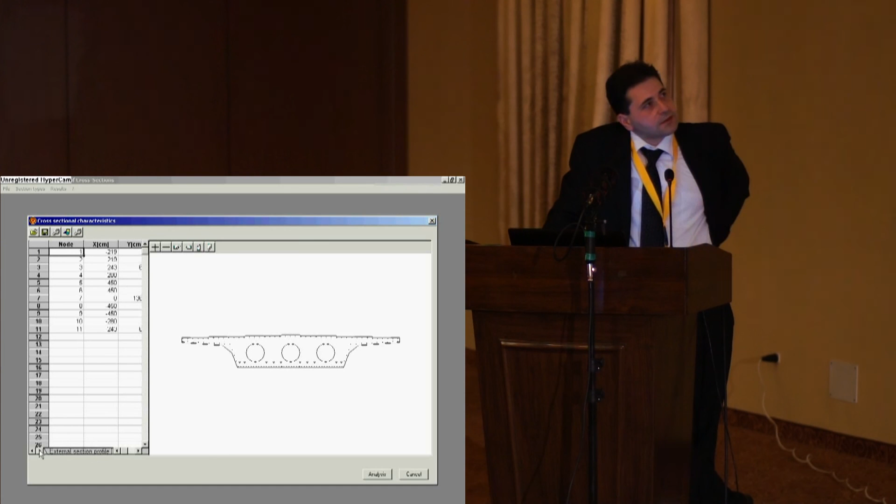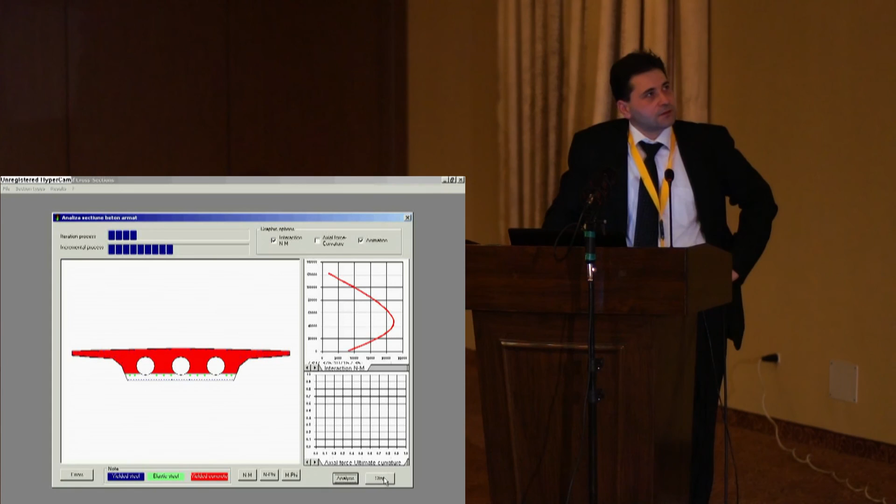Here is an example of how to draw the vertical interaction diagram for a composite cross-section, as you can see, and the procedure is very quick. We can see explicitly the distributions of the plastic zones, the yielded bars, and any other important parameters.